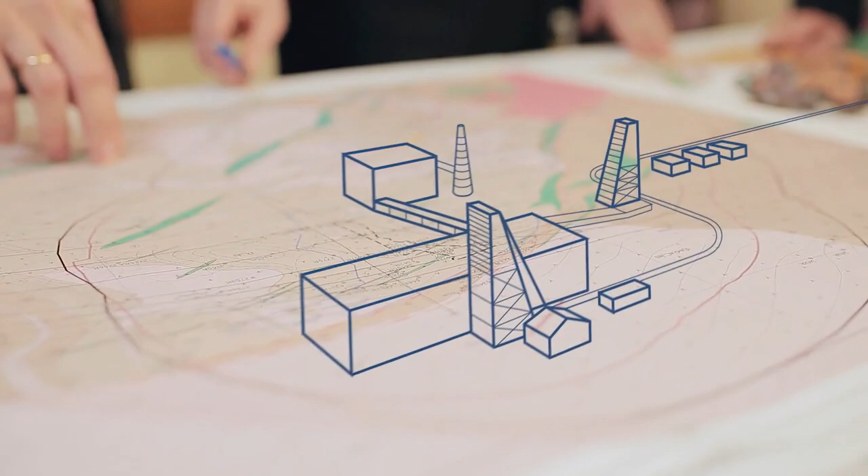The mining department of the Uralmekhanobr Institute was founded in 2001. The Uralmekhanobr miners actively participate in developing a resource base for the ferrous and non-ferrous metallurgic industries, as well as the gold, tungsten, potassium, and diamond mining industries in Russia, CIS countries, and Africa.

Today, the mining department consists of 5 sub-departments and employs 100 people. 4 chief project engineers are in charge of coordinating the work of the Institute's departments and client interfacing.

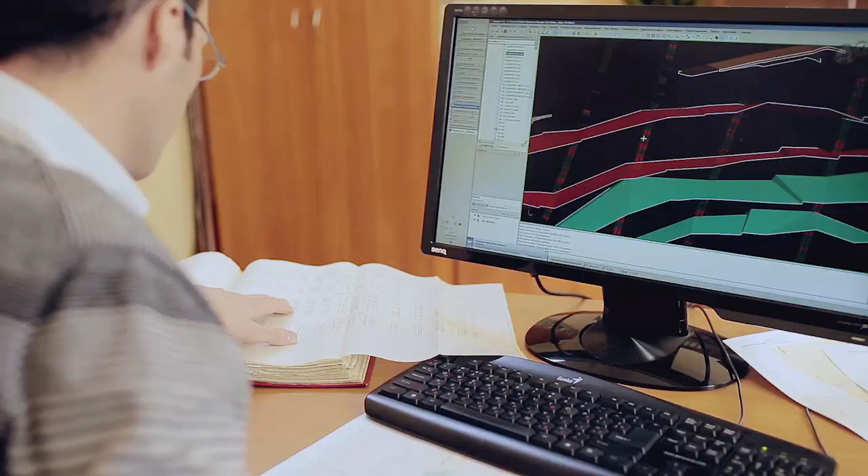The Institute's Department of Geology prepares baseline data for research and development, as well as the geological and commercial justification for mining projects. The department's specialists develop feasibility studies of exploratory and permanent conditions to verify and update estimates of a field's reserves and assist in updating the State Register of Reserves.

They reassess the estimates of solid mineral reserves of operating mines and prepare geological databases for mines and models of fields.

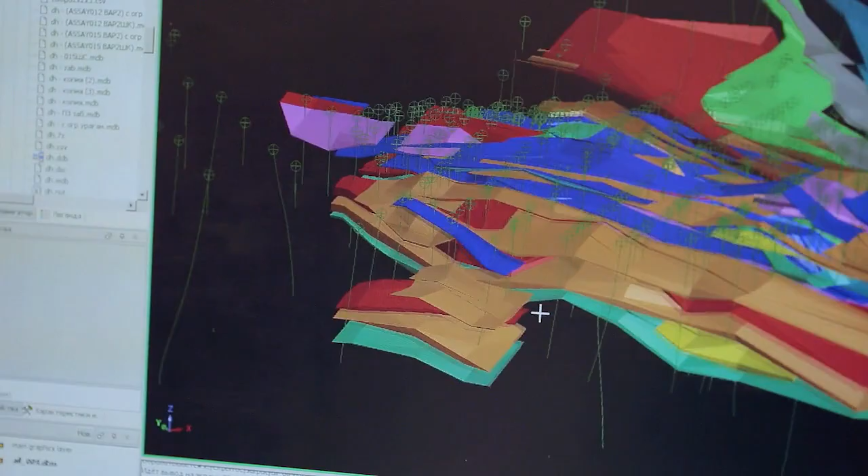Serious scientific prep work must take place before construction or renovation work on a quarry or mine can begin. The specialists of the Mining Science Department handle this task. Every year, they conduct more than 30 scientific studies for quarries and underground mines.

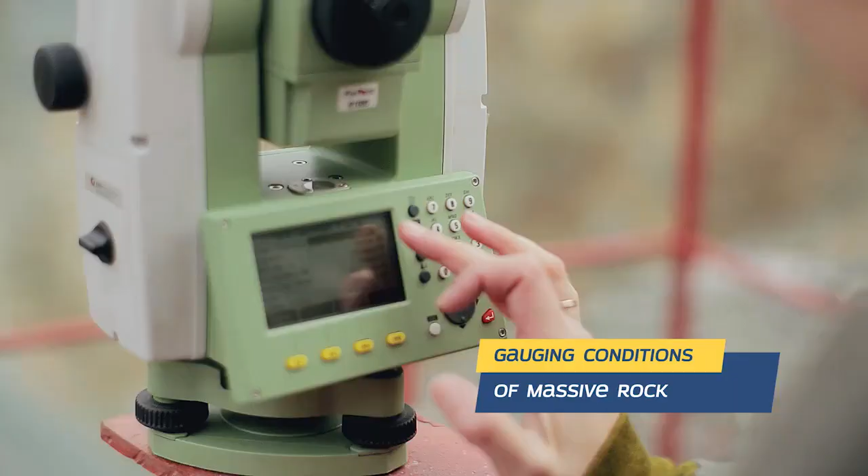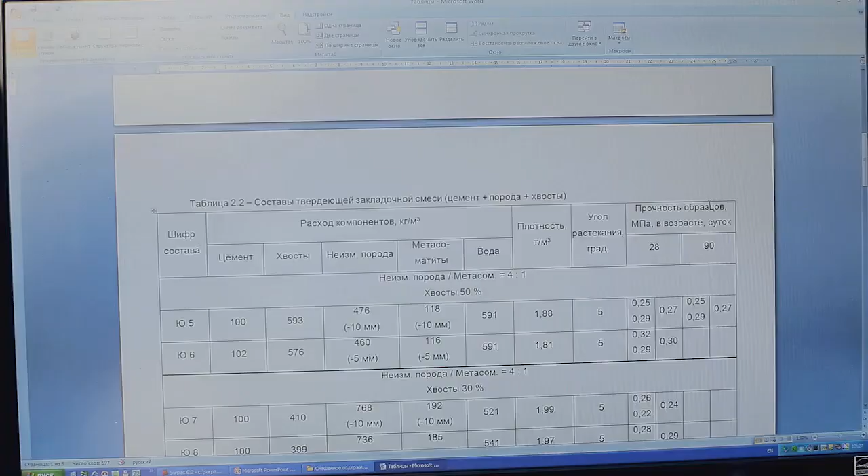They create efficient technologies for mining peripheral ore reserves. They analyze and monitor the stability of quarry walls and strata movement, as well as the seismic and blasting safety of mines. They develop formulas for hardening filling mixtures based on locally available materials and the technology for filling mine spaces.

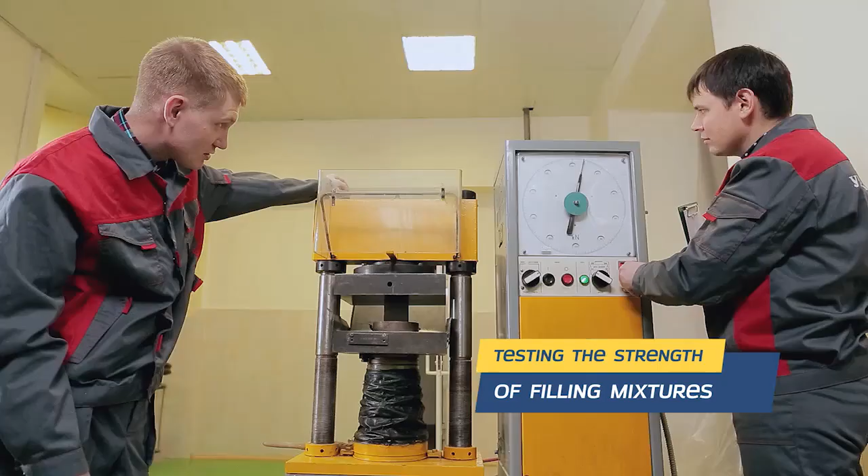The workspaces of the Mining Science Department are equipped with state-of-the-art equipment and instruments that allow precise and accurate research to be conducted and enable timely preventive measures in the event of changes in the mining and geological conditions.

This approach makes it possible to save lives and protect the health of mine workers, while reliably ensuring the smooth operation of mines, supporting the sustainable use of natural resources, improving raw material production, and reducing capital and operating expenditures.

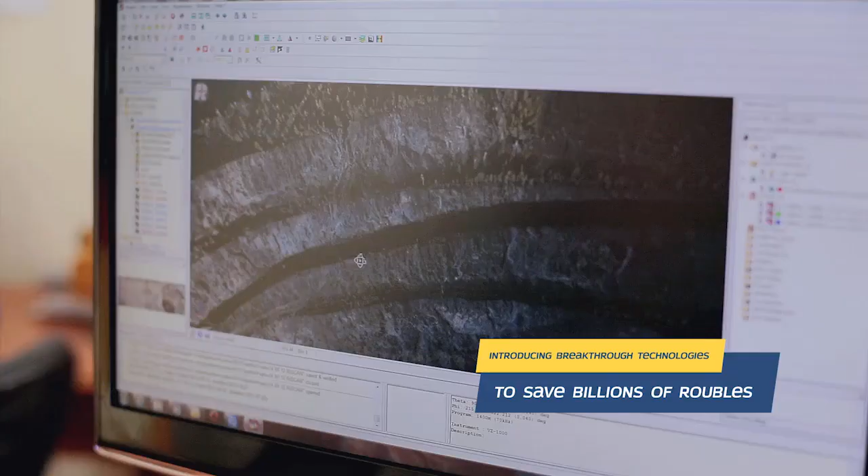The scientists and engineers at the mining department introduce breakthrough technologies in mines, saving billions of rubles. For example, when designing a 200-meter deep quarry, each degree of increase in the overall slope of the quarry walls reduces the amount of excavation by roughly 1 million cubic meters.

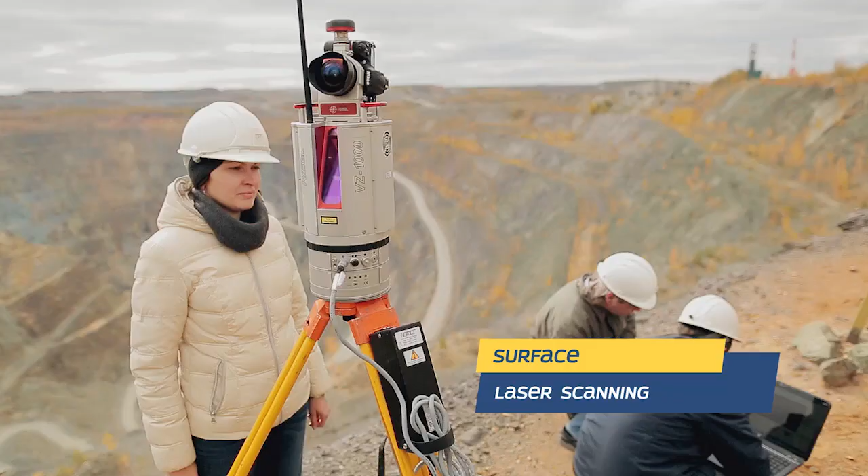3D laser scanning of mines makes it possible to improve the monitoring of mines. When switching from open-pit mining to shaft mining, the peripheral ore reserves remain enclosed within the quarry. The specialists of the Mining Science Department develop technologies for mining these sections on the basis of studies and quantitative analyses.

The introduction of new technologies made it possible to extend the service lives of the Gajski, Uchalinski, Sybaisky and Molodezhny quarries, and to increase ore output by 1 million tons.

Advanced technology for drilling and blasting work enables the Alrosa mining company to reduce its consumption of explosives by several thousand tons. The proposed technology will make it possible to reduce explosive costs by up to 60% in underground mines alone.

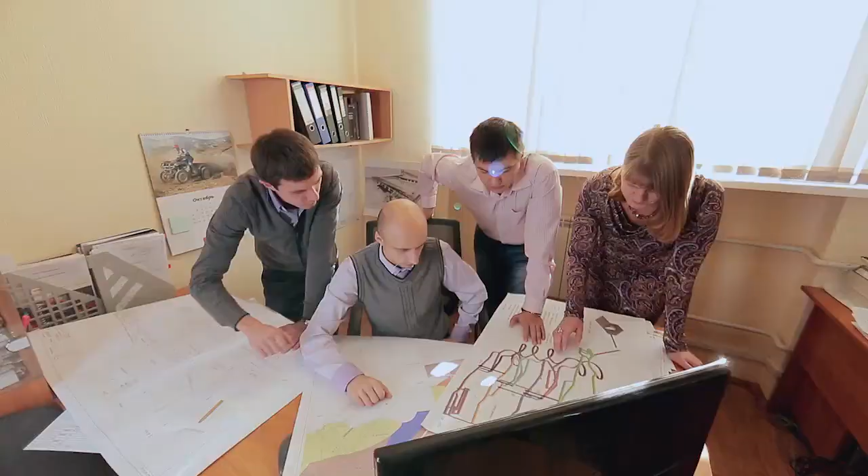At this stage, the Mine Design Department arrives on the scene to build on the work of geologists and other scientists. They develop the design and working documentation for the construction and modernization of the mines, calculate the justification for investments in construction, and conduct feasibility studies of exploratory and operational conditions.

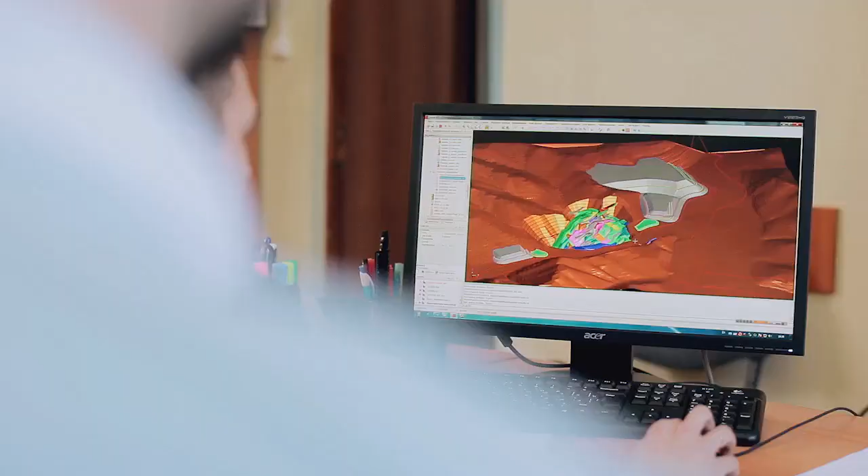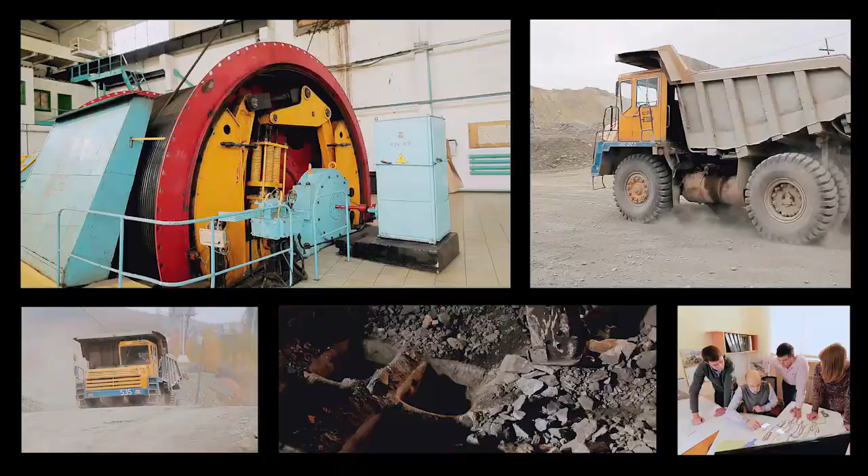This is followed by the mechanical phase of mining operations, developed by the Mining Mechanics Department. They design mine surface complexes, ventilators and compressors, drainage systems for quarries and mines, underground maintenance complex and storage facilities for fuel, lubricants, bulk materials, among others, crushing, batching, and conveyor complexes.

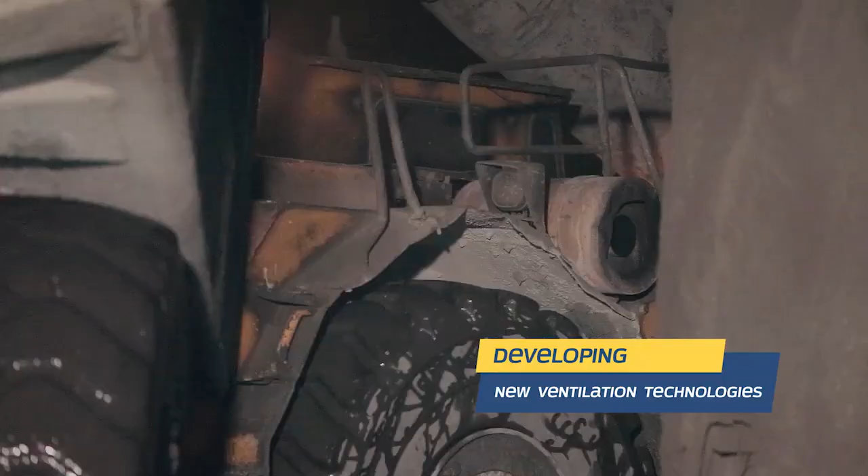The total volume of excavated mine space is increasing. The current capacity of mines is large enough to contain several cities. Therefore, the airflows in mines must be controlled professionally and reliable ventilation must be ensured.

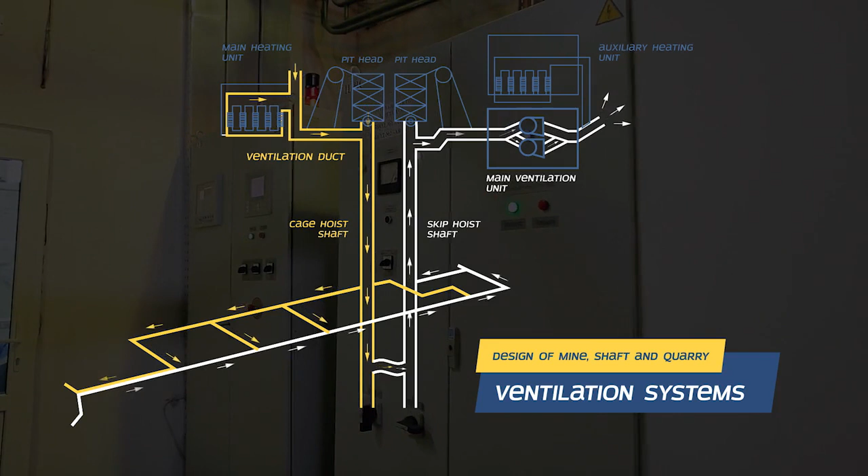The Mine Ventilation Department handles this task. New designs from this department make it possible to properly ventilate mines while cutting costs.

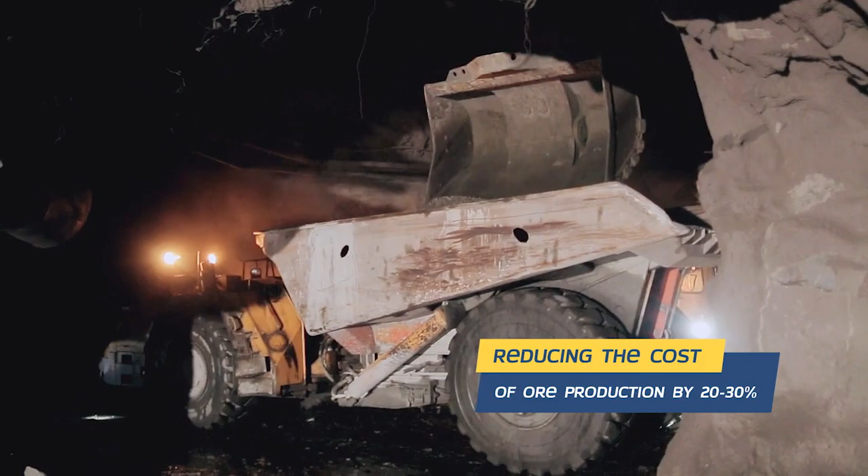According to preliminary estimates, the introduction of a complex of technologies based on the latest approaches to ventilating mines can reduce the unit cost of ore production by 20 to 30%. For example, in one mine, it was possible to avoid driving 2 ventilation shafts priced at about 6 billion rubles.

Cost reduction is an important factor, but the most important thing in mining is to ensure workers' safety and provide comfortable working conditions. The work of the Uralmekhanobr Institute's mining department helps people to live a healthy life, ensures the

sustainable use of natural resources, reduces both operating and capital expenditures, and supports Russian metallurgy and the development of mining cities and towns, while providing warmth and comfort to millions of Russian families.